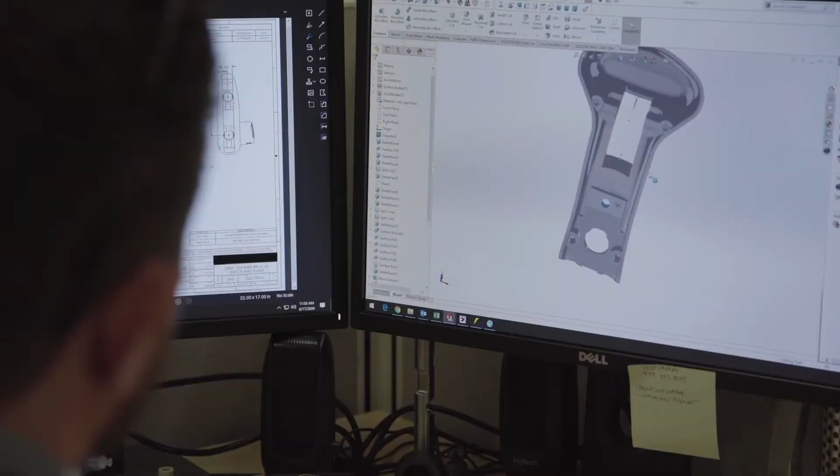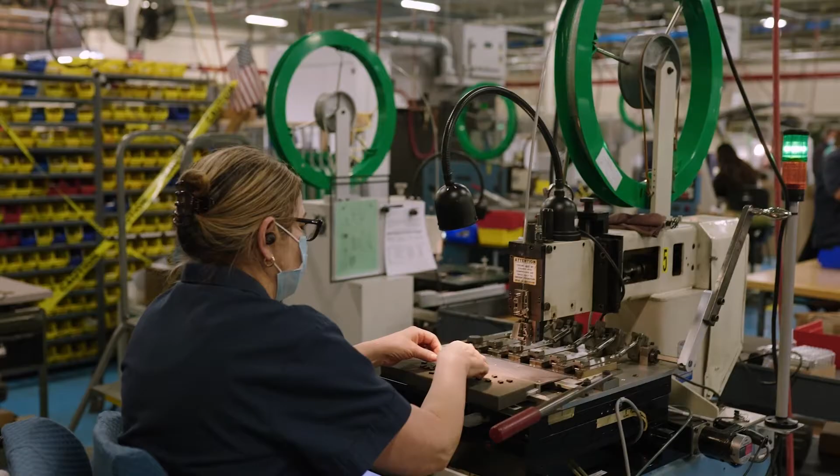According to AdvanceCT, 3/4 of the manufacturers in Connecticut were considered essential during COVID and continued their operations without interruption. Governor Lamont and David Lehman provided the sector with skillful leadership, guiding our state to become one of the healthiest and most fiscally secure to emerge from the pandemic.

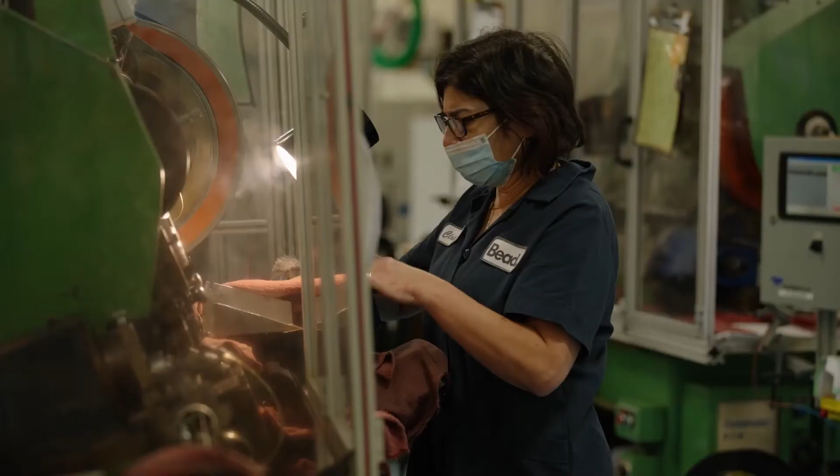But of course, it's not only the people in charge who are responsible for our collective well-being. It's the everyday workers pursuing new skills, the younger generations taking over family businesses, and the customers who prefer the care and precision that they can still find in Connecticut manufacturers. Let's look at a few of the quick pivots that our companies successfully made when faced with the challenges of 2020.

Hi, I'm Stephen Barmore, and I'm the Director of Business Development at Curtis Packaging. Been around since 1845, and we manufacture folding cartons. Boxes that you see in a retail setting, cosmetics, liquor, chocolate, golf balls. Titleist is our largest customer, and our largest segment is cosmetics.

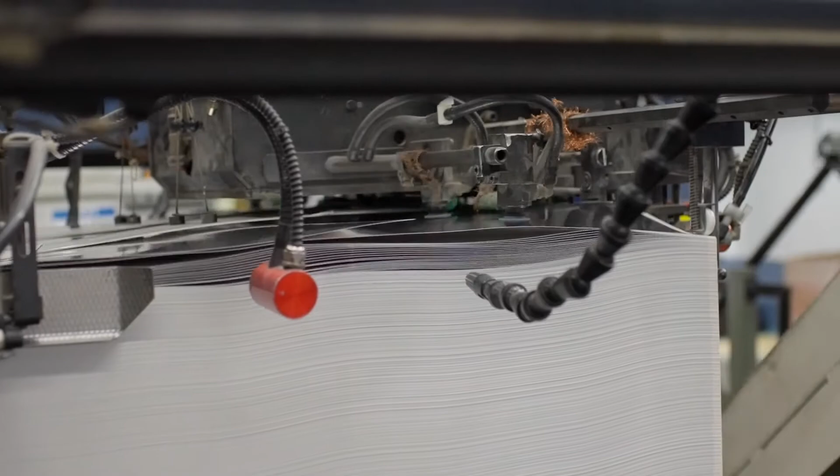Our production facility runs on 100% renewable energy, and we are a carbon neutral entity. When taken into consideration our ownership of a forest in Costa Rica, we're actually a carbon negative entity. We're certified zero waste to landfill, and you'll see as we walk throughout the plant that everything is recycled.

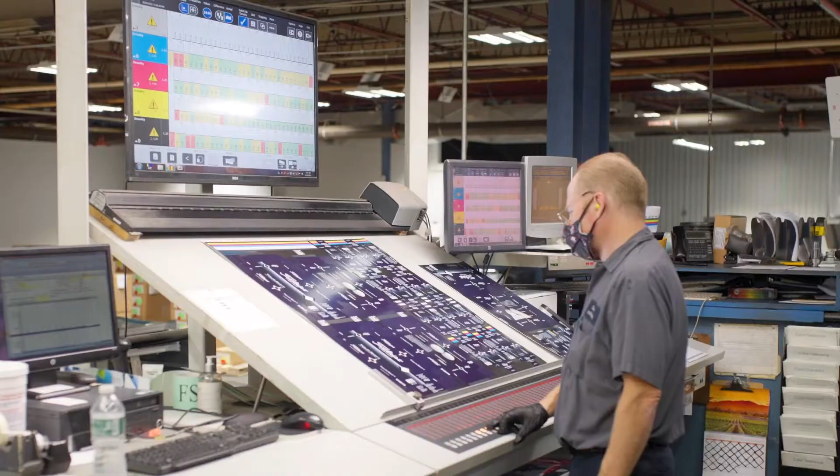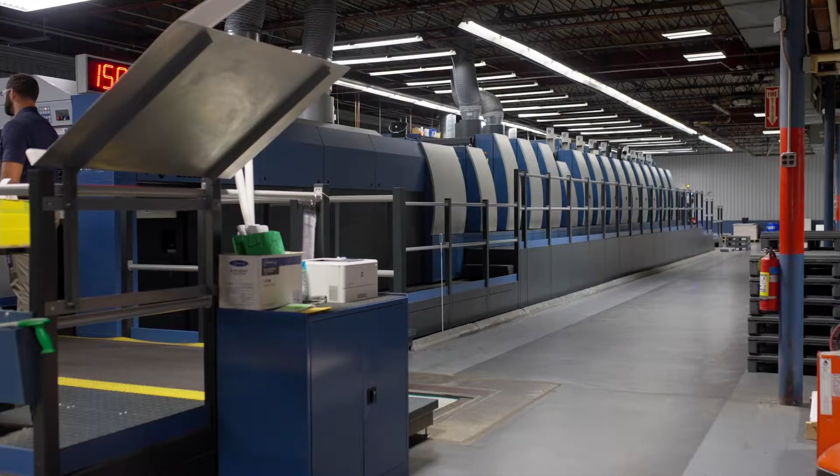In 2020, when COVID-19 hit, we switched our production to manufacture face shields. For about 4 to 5 months, we were able to supply those face shields around the state and around the country. When we decided that we were going to pivot to make face shields to help people with COVID on the front lines, we decided that we needed to do a few things.

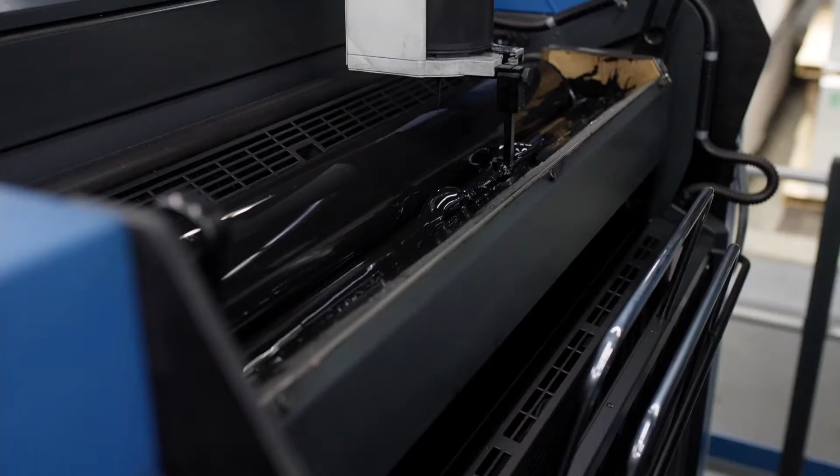One, keep the design simple so that it could be flat packed and shipped out flat, and also so it could adapt to our machinery. Two, test our machinery to make sure that it could cut the thickness of the material that was necessary. And three, that we can manufacture these in a way that was cost effective, fast, and efficient.

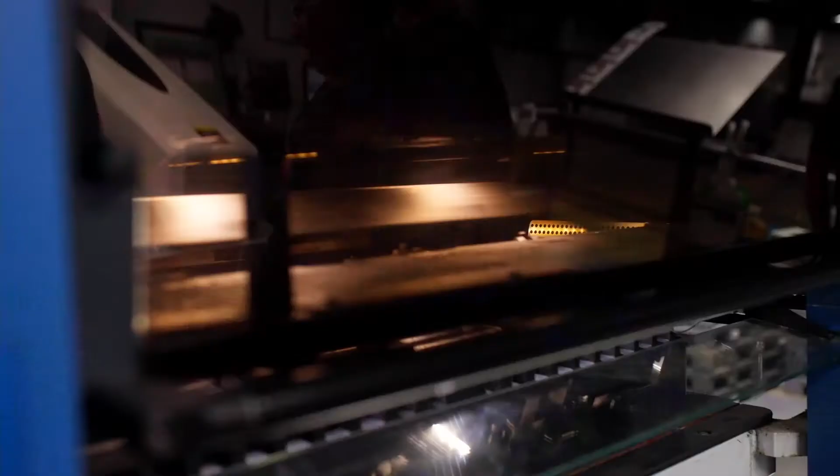As 2021 comes to a close, we're excited to continue to support our current and new customers as they continue to grow in a post-COVID world.

Hi, I'm Vincent Wong. I'm the Chief Quality Officer here at Tomz Corporation. We're a medical device manufacturer, contract manufacturer for med device, primarily focused in spine, but always looking to partner with our medical device OEMs that are out there.

This organization has been around since 1988, so 30 plus years of some really great successes, 8 expansions at this CT location with the most recent expansion in Indiana. Always looking at innovation and expansion and being a better partner for our customers and medical device patients worldwide.

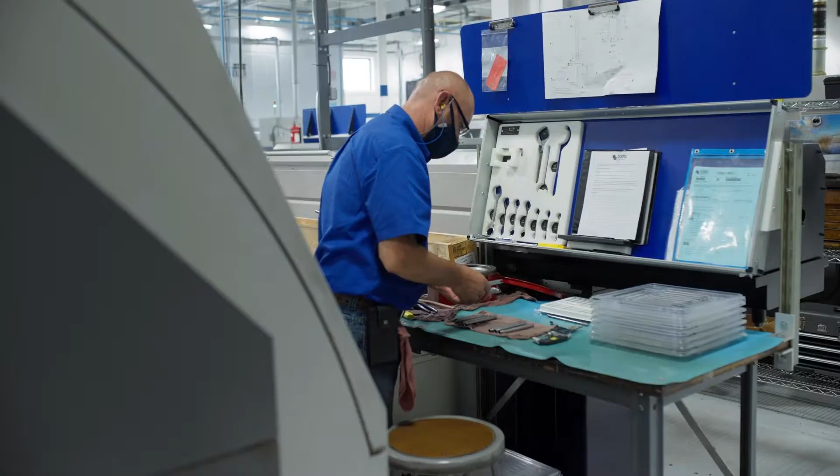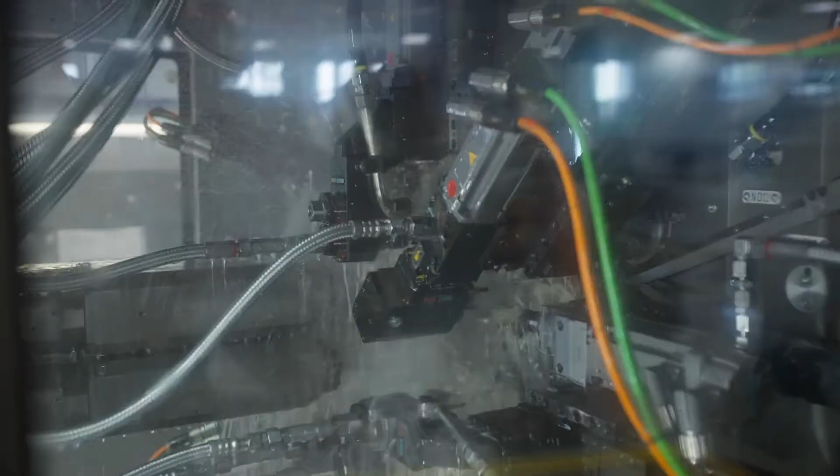As a core function of our business, innovation and investment is a part of our strategy. Every year we're looking at the next best thing, from staffing to technology to machining to applications that are going to end up making our lives easier with our engineering staff, our production staff, down to supply chain, you name it. And one thing that I always joke about with our CEO is that when I first joined the organization just about a year ago...

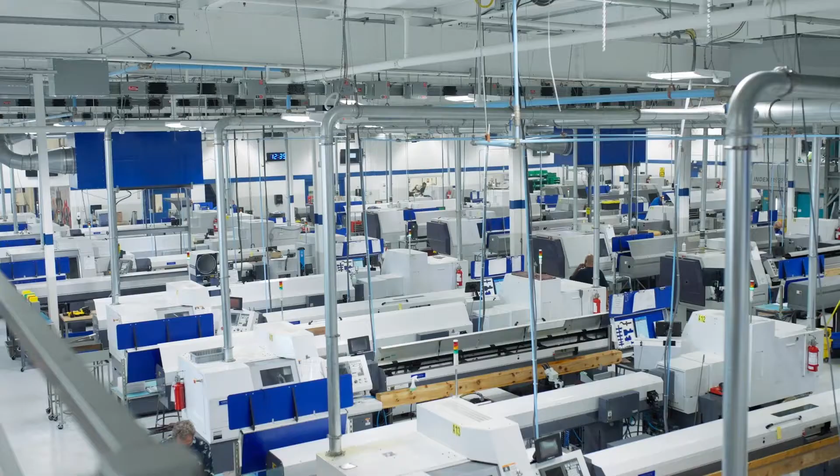He said he wanted to operate in 2040. He wanted to operate in that realm now. So always challenging our folks, all levels of staff, to look at what can be bigger, better, and faster, and be more efficient with how we operate on the day-to-day.

On the machining side, a lot of what we do here is machine medical device components for spine, all different types of machining capabilities. One of the more recent innovations that we made in the last 2 years is around 8-axis index machines. Those machines can actually replace 5 to 6 of our existing machines that we have out on the floor.

And you think about the ability to speed up delivery, speed up our lead time for our customers so we can get product and help them get product out to the field faster. It is a key part of our business model.

And while we spend a lot of time on the operational and QC side, we're also investing in how we can be a better partner for our customers on the new project side, on the engineering side. With COVID really shocking the system, shocking the world in how we operate in manufacturing, what was typical in the past—face-to-face presence, customers coming on site, us visiting vendors—that really went away in the last year and a half.

So thinking about how we can still have that level of connection with them, a key piece of that was investing in virtual technology. We just started the installation, and we've tried it out and piloted it with a couple of customers now.

Between visual defects, if we're looking at a better way to manufacture, it's not as easy for them to come on site and look at those parts. Using the virtual technology to hop on a Microsoft Teams meeting and say, hey, this is what we're looking at, this is actually what we think we need to clarify—they can actually visually see that over the screen, as a replacement to the typical on-site visit.

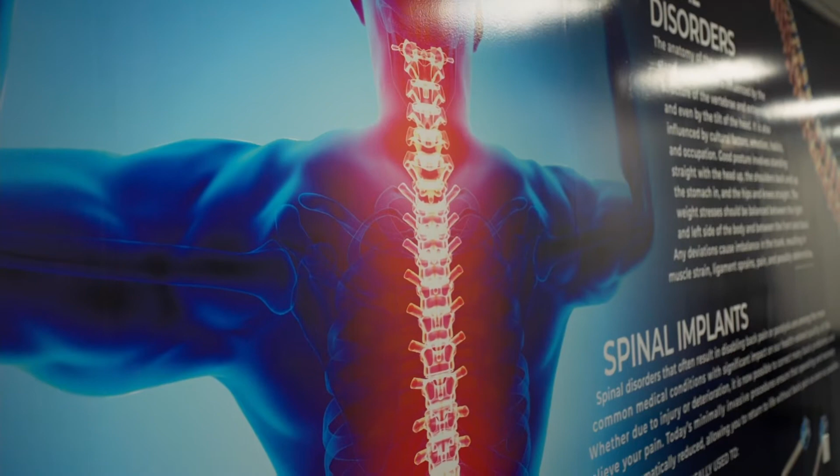So those are just a couple examples of, in the last year, what we're trying to tackle at all levels of the organization—to make it easier, more efficient for how we operate, not just internally but externally. That truly is a key element of this business, and really what attracted me to Tomz as well—that energy, that empowerment to try something new, the risk to try something new at limited cost, to help our customers and our customers internally.

Hi, I'm Brittany Ishwood, President of Burke Aerospace. Burke Aerospace is an aerospace and IGT component manufacturer, focusing primarily on EDM, milling, and turning.

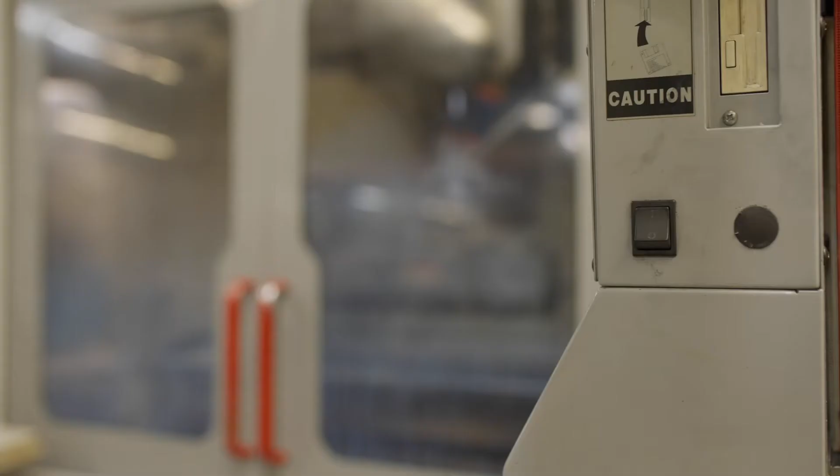We never hunkered down during the pandemic. We knew we had to make a change right off the bat. Prior to COVID, we were 80% commercial, 20% military. Now we are 80% military and 20% commercial.

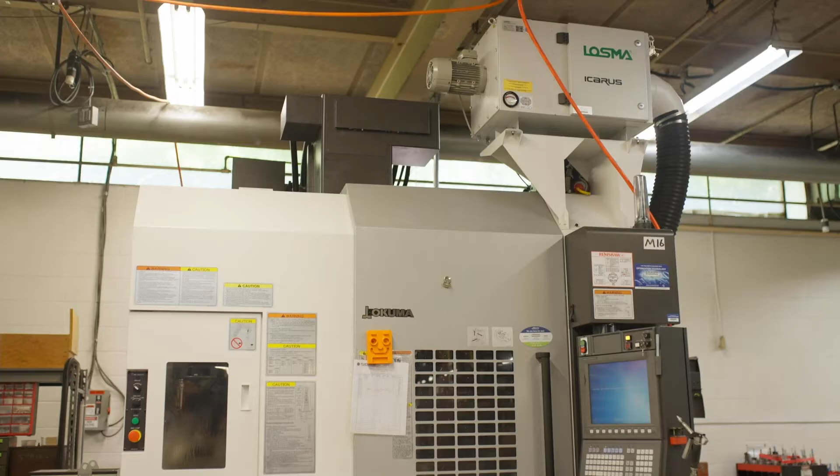We knew engineering needed to develop NPI in a short time frame, so we put all hands on deck from both locations, Connecticut and South Carolina, to focus on all NPI. So not only did we pivot engineering into focusing on military development, but we also invested quite a bit in new machinery for both locations.

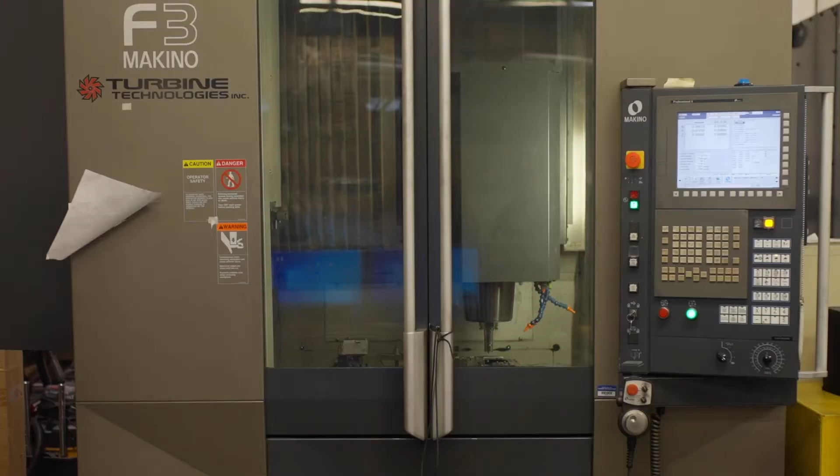We were awarded 2 grants from the state of Connecticut to support additive manufacturing and equipment with 3D printing. Our focus is going to be printing tooling to allow us to reduce cycle time of development in NPI. With the ability to do this, we'll take a cycle time that used to be 8 weeks and condense that into 2 weeks.

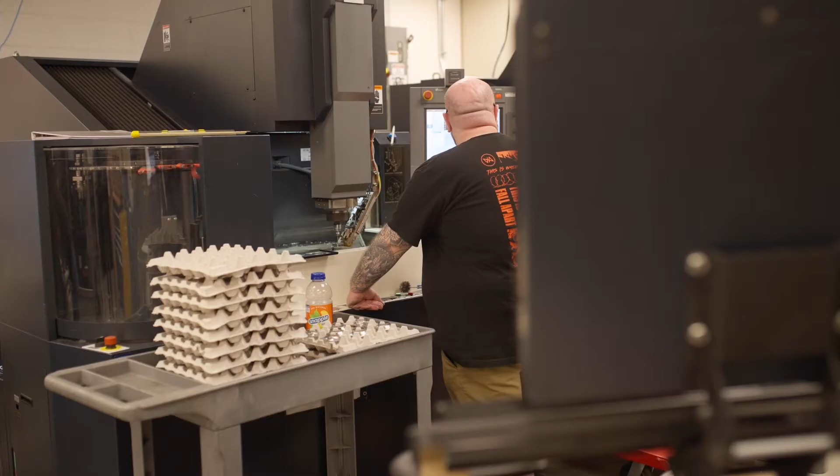This will be new for Turbine Technologies because we were primarily a machining shop. Now we want to pivot into additive manufacturing for tooling, and then segue us into making complete parts through additive manufacturing. Our engineers never stopped innovating and thinking of ways to make us more advanced and cost effective.

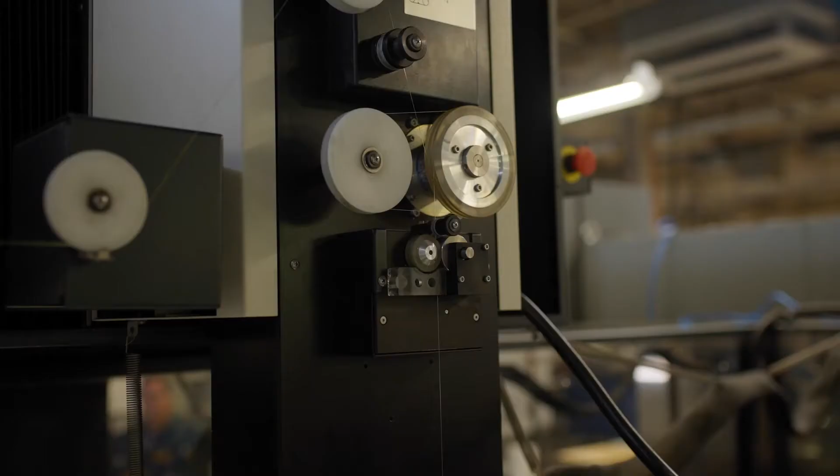One example is that we are now EDMing blades and inspecting blades by holding the blades by the root. This allows us to EDM, pre and post inspect, all while holding in the same fixture, which results in decreased cycle time and less nonconformances. We run our shop with less than 1% nonconformances and a less than 1% scrap rate.

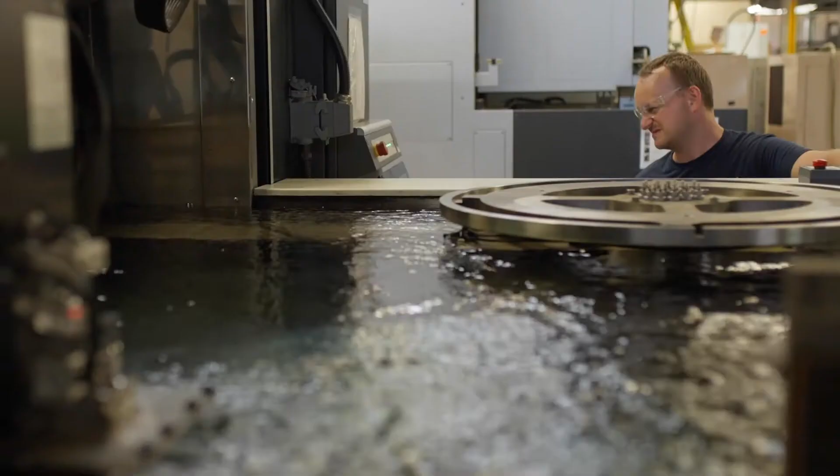At Turbine Technologies, we have always been challenged and are prepared to come out of the pandemic stronger than ever. Our customers see us as an extension of their team, and that makes us very proud of what we have accomplished to date. It's also a reminder that we can never stop treating our employees fairly, offering training to our team so that we can continue to innovate and be ready for the next challenge.

Hi, I'm Ed Gilchrist, I'm the owner of JAR9. JAR9 is a product design development company, also a contract manufacturer. This one started as just a product design and development company about 15 years ago. This firm specifically, we've focused on larger clients, partnering with our clients as best we can to be everything for them.

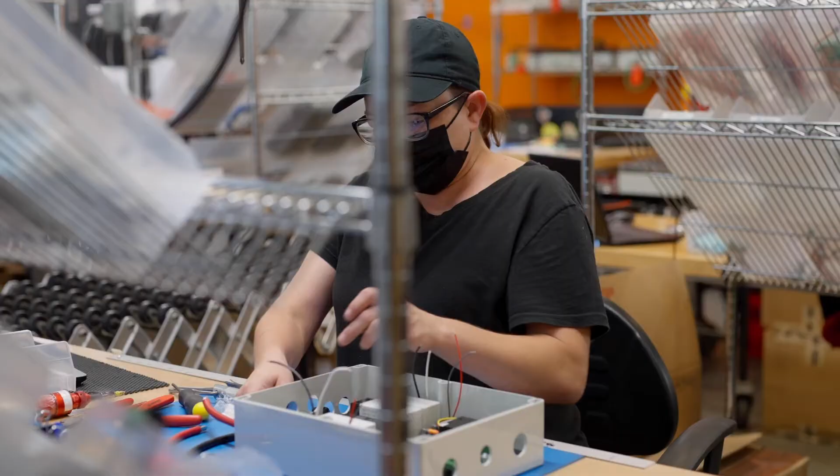About 3 years ago, we started a relationship with a company called Juice Bar. They were critical to help us get through the last couple of years, partly because Juice Bar is a company selling EV chargers. As an EV charger manufacturer, that market has, despite all the pandemic issues, grown really rapidly. So we started doing engineering for them, then took on the manufacturing about 1.5 years ago. We've grown from a couple thousand square feet of manufacturing into 6,000 to 7,000 square feet now, and we're going to be jumping to 40,000 square feet, primarily due to the EV charging market.

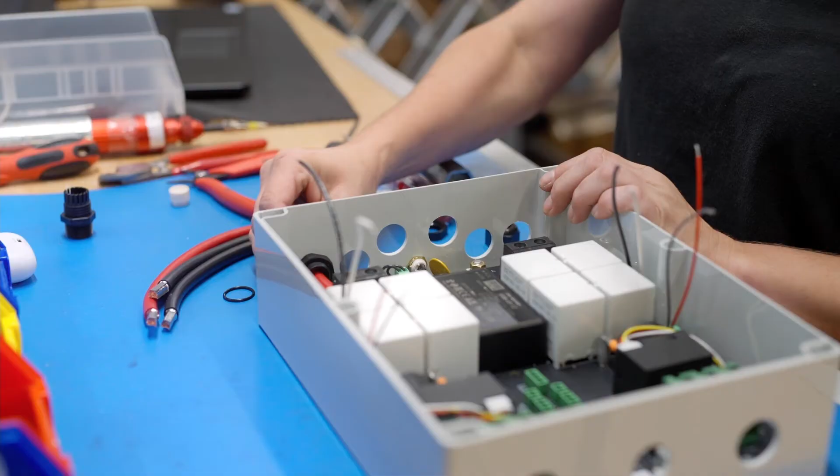What's helped us get through it is, one, we're pretty vertically integrated. We have design here, engineering here, manufacturing, and sourcing. We've used primarily Connecticut-based manufacturers for the parts we need, and US manufacturers as much as possible. 70% of what we've built comes from the US. 100% of our manufacturing business is now Juice Bar.

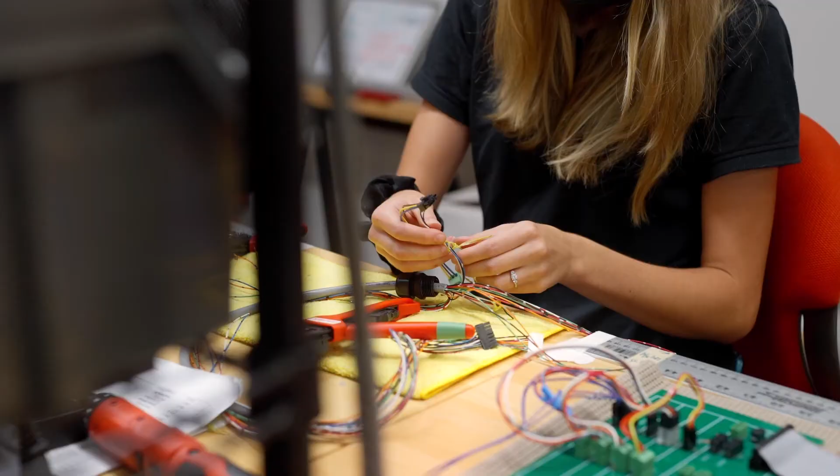About 1.5 years ago, I had to make the decision: do I continue to do other manufacturing for other clients? Honestly, we determined the only way to get through and be a good supplier to them was to focus solely on Juice Bar for now. So we completely reconfigured the factory to be an assembly line to build EV chargers. Trying to be really good at one thing has helped us a lot, so we haven't been distracted with lots of little small jobs coming and going.

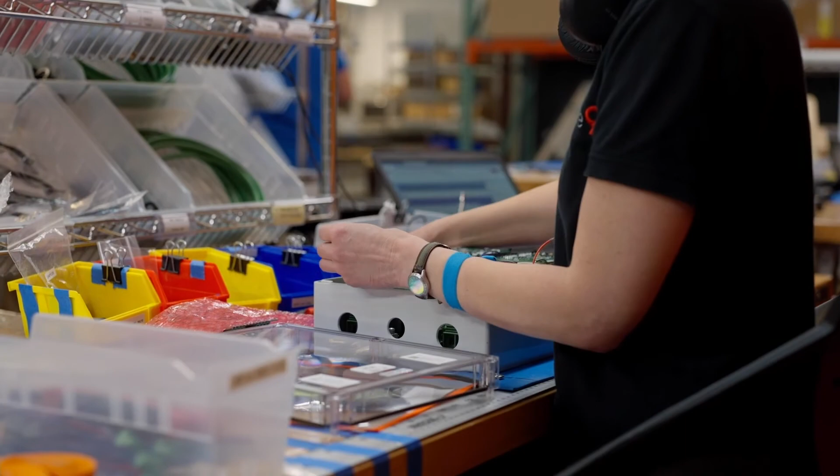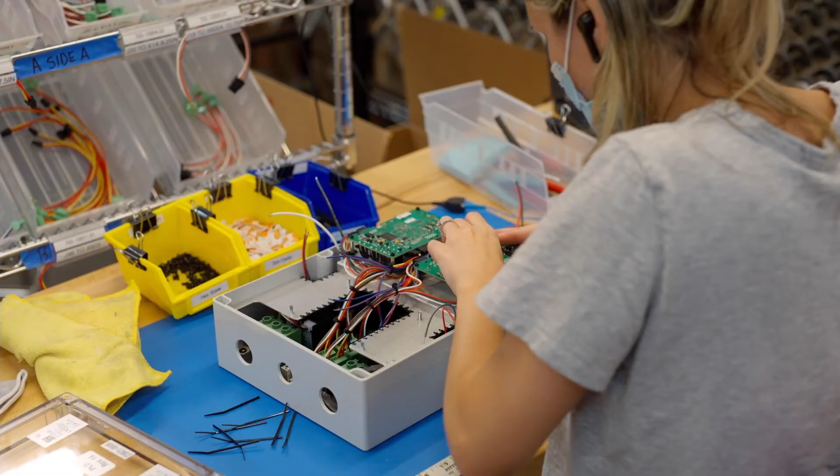When we move into our new facility in 2 months, we're looking for another factor of 10 growth over the next 12 to 18 months over there. Our goal is to continue bringing more manufacturing into Connecticut. Some of that might have to be done in-house if we can't find somebody local to do it. But I think our next big change is some moldings we do in China are going to come back to Connecticut. There's a bunch of parts made in Europe that are coming back to Connecticut too. Our next big push is to bring as much here as possible. We're committed to doing that, and I think that'll help us get through the next time there's one of these, or maybe the continued saga of this.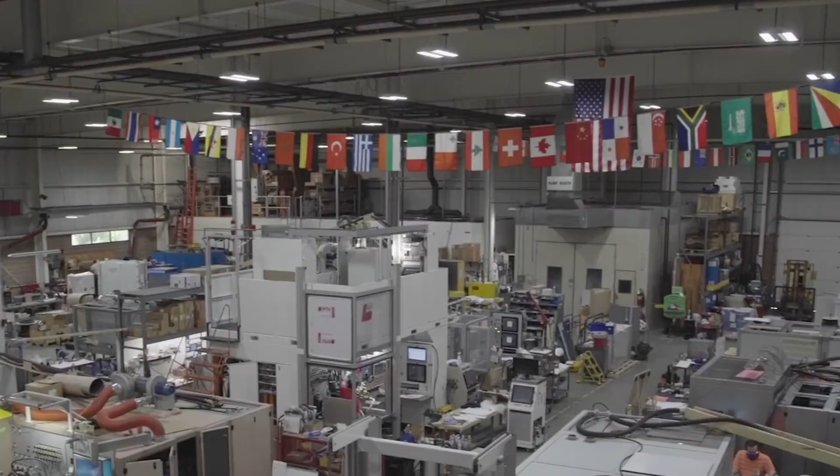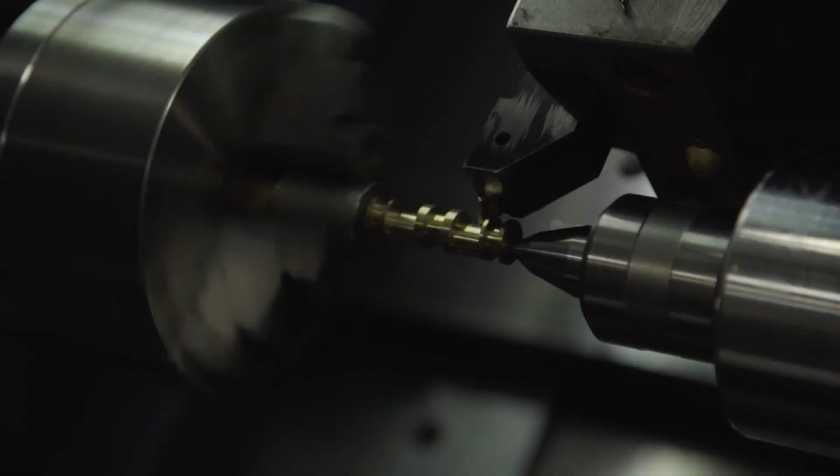From reconfiguring the shop floor for social distancing to becoming part of the emergency preparedness supply chain, Connecticut came through for the nation and the world at large. But this is no surprise. It's our tradition, and in fact many Connecticut manufacturers accept it as a responsibility. We innovate to stay prepared. We innovate because we prefer to look forward, not back. And most of all, we innovate because we have deep roots in our communities and we know we're here to stay. That's just what innovators like us do.

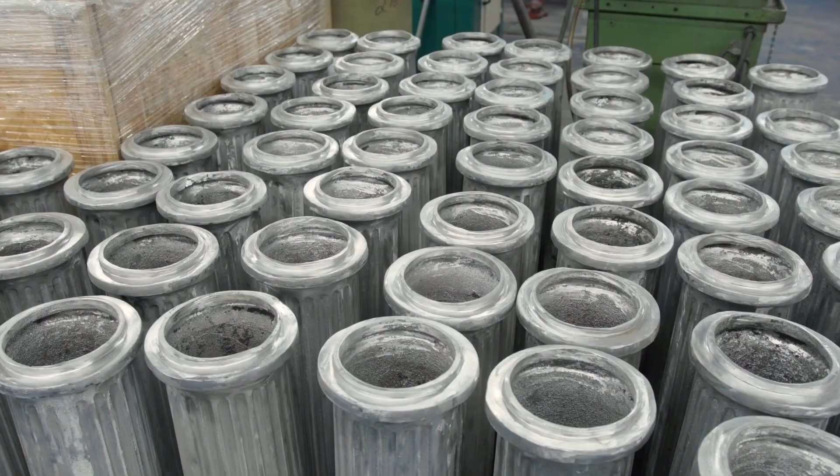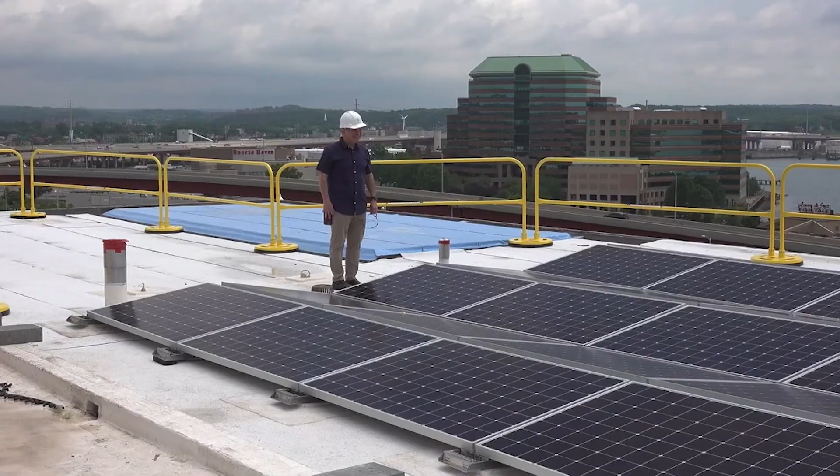We thrive. So what's next? Well, Connecticut is becoming a hub for lean, green and clean manufacturing, and with good reason. We are proud to demonstrate strong stewardship of natural resources, and to be home to the nation's first green bank and first net zero hotel. Now with incentives to reduce energy use and abundant solar and offshore wind energy coming online, manufacturers in our state can see a cleaner, greener future than ever before.

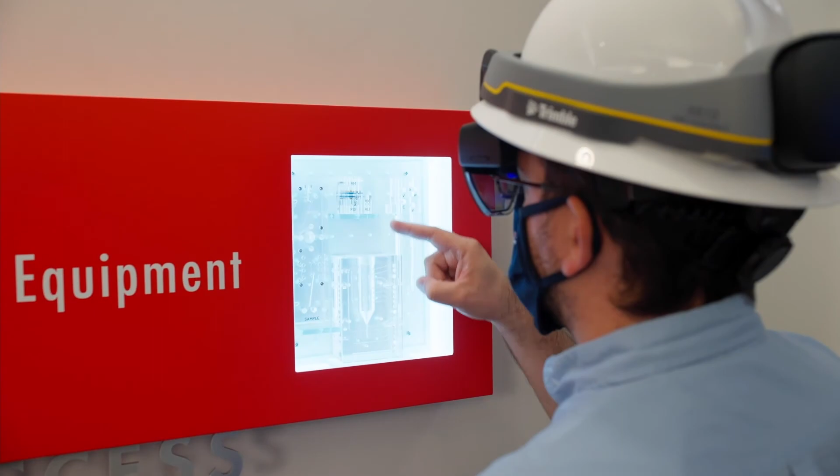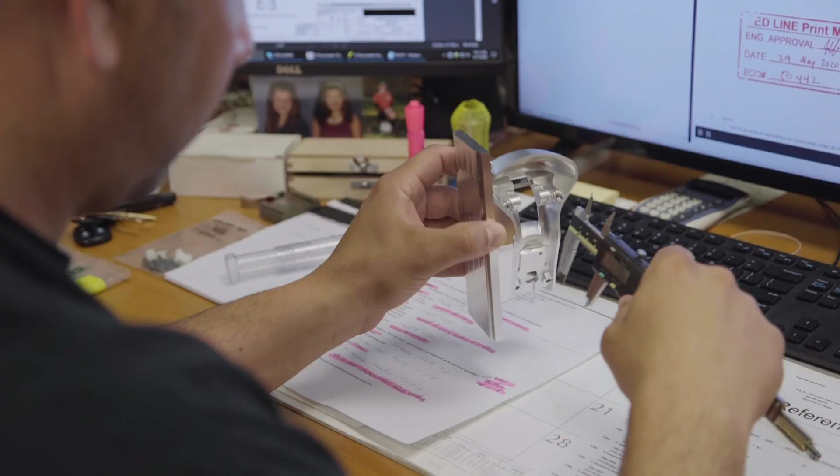And the workforce? Well, we are seeing a rapid influx of population into Connecticut from neighboring states, in part because people can achieve a very high quality of life here for an average cost of living. Access to good childcare, schools, internet, parks and healthcare create a winning combination, meaning employers can develop all skill levels and retain those who enjoy working at the top of their game.

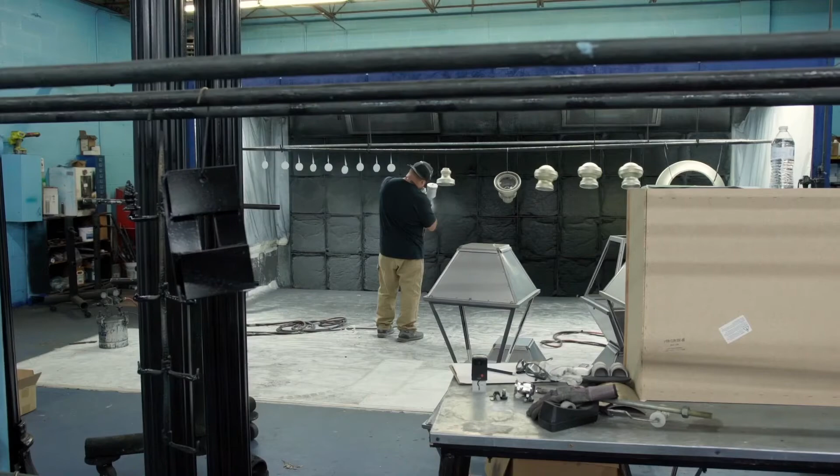It's amazing to look back and see how far we have come and how much we actually have to celebrate. Rising through the crisis of COVID, we leveraged our natural bent to create and find solutions. In the process, we proved that Connecticut manufacturers are indeed here to stay and here to thrive.